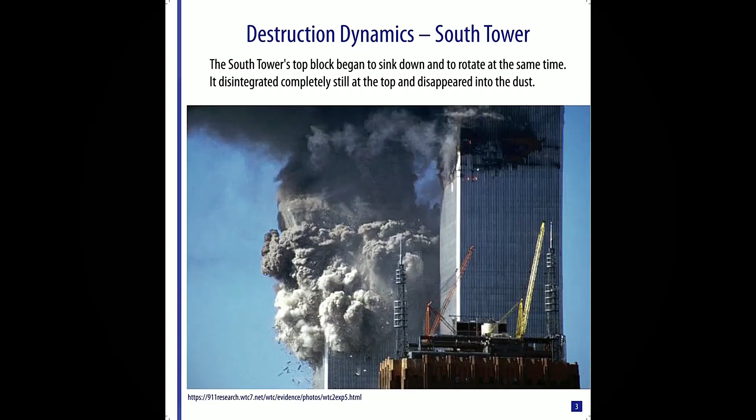First the top block began to sink down and at the same time rotate slightly. Then it suddenly stopped in its rotating movement and dissolved completely in the upper part, disappearing in the dust. This dust was dark black at the top due to vaporized iron, and grey-white at the bottom due to the pulverized concrete - it was two-layered, two-colored. So this slide is: there was a two-colored dust, and the twisting moment, or torque, of the sinking top block disappeared.

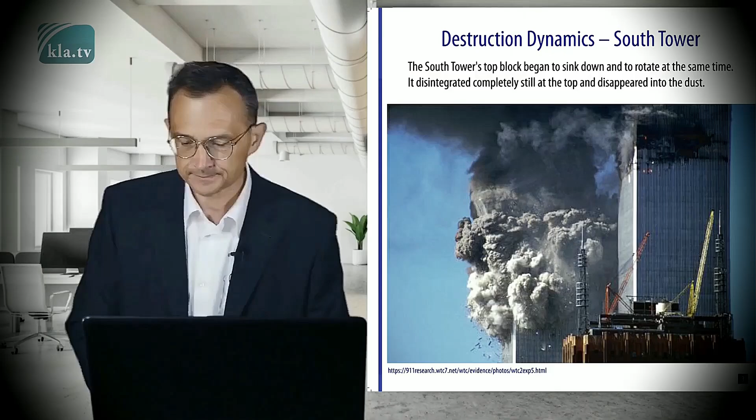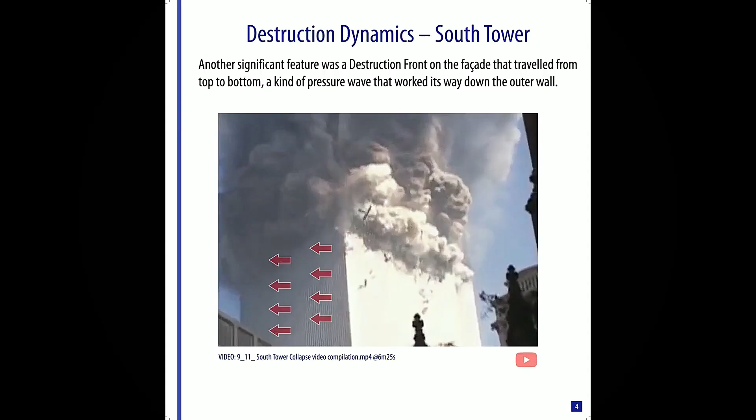Further, you could observe a distinct front of destruction making its way from top to bottom on the outer facade of the building, some kind of pressure wave. This wandering front of destruction, with some single outbursts, or squibs, here and there, is generally misinterpreted as evidence for synchronized detonation of many thousands of individual explosive charges. But we have a continuous process here. The segments from a tower built of individual segments tear apart individually, one by one, and delayed, as they resist. You can see it in this video: first the tower buckles, and then the overpressure is released, and the pressure wave travels downwards.

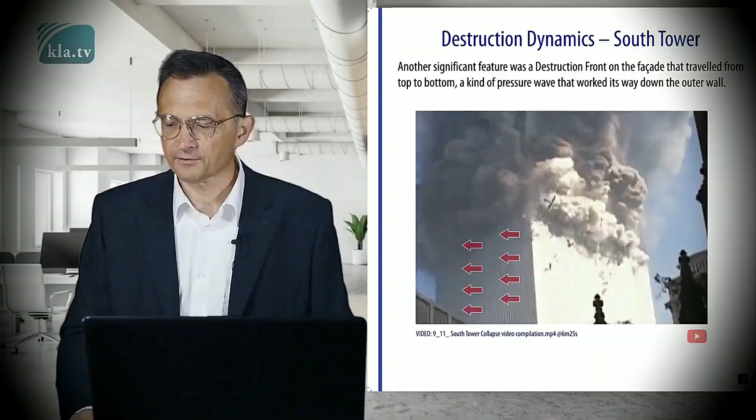So, we summarize for slide 4: a pressure wave, traveling down, was observed on the facade. Now we come to the destruction dynamics of the North Tower. A wall of flames briefly emerged from the hole in the North Tower before the top block on the firmly standing tower sank down and dissolved.

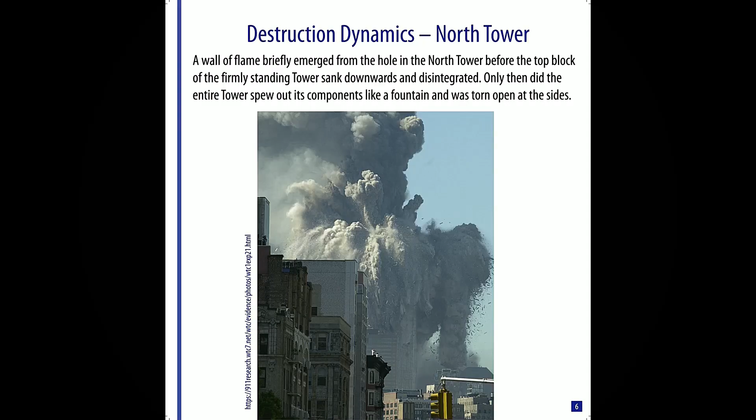So, a wall of flames, put briefly for this slide. It was seconds afterwards that the entire tower spewed out its components fountain-like, as can be seen here, and was torn open at the side. So, this slide: fountain formation.

The destruction dynamics of Building 7 was clearly different. Building 7 produced deep black smoke for hours until its sudden collapse in the late afternoon. Only seconds before freefall, the upper structure, the so-called penthouse, collapsed and light started flooding through the glass window panes from above. It was seconds afterwards that the entire building collapsed, unexpectedly and suddenly, with no resistance from the inner vertical steel columns and outer facade.

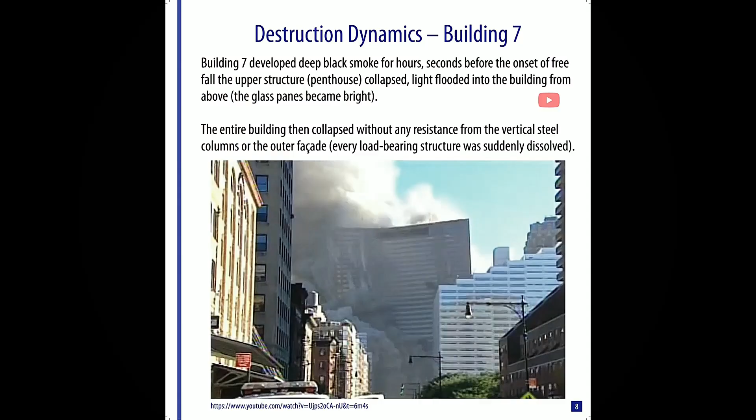In other words, any load-bearing structure had suddenly been dissolved. Then a mushroom cloud developed and rose into the sky, more than 1.5 kilometers high. Here is a short video of the collapse.

Watching all day. This is like watching the collapse of an active volcano, and the dust from it is not unlike that from a volcano. And that eventually would either come down on its own or it would be taken down. I would imagine it came down on its own.

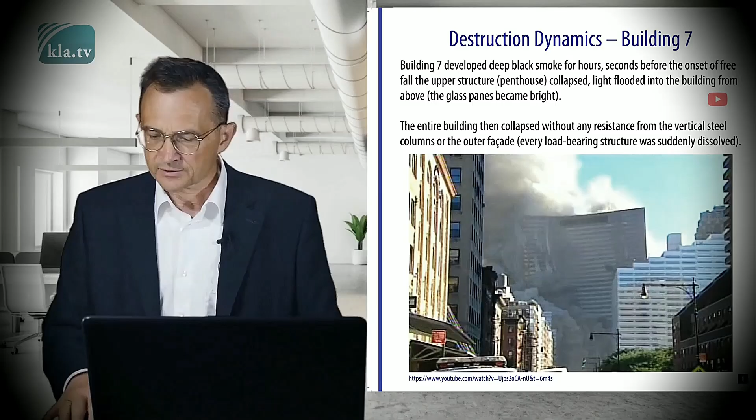The height of the mushroom cloud can be easily estimated by the 4 buildings of the World Financial Center. These buildings, on the right, are approximately 200 meters high. So, slide 8: the mushroom cloud over Building 7.

But today we are focusing on the events in the North Tower, Tower A, WTC-1. This is the tower with the antenna on the roof. We have particular interest in the 22nd floor. Pasquale Buzzelli was there when the destruction hit.

We know from the cross-section of the blueprints, the tower had a square floor plan, 64 meters by 64 meters. The outer facade was a steel grid which at the same time had a load-bearing function. The inner core had a rectangular shape housing the elevator shafts, the service units and the stairwells. Office spaces were spacious and open, situated between the core and this outer facade.

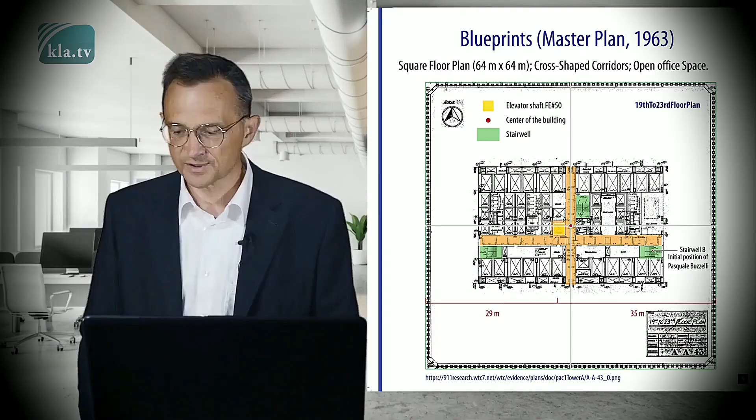Our key witness was exactly there, at that time. So this slide made us familiar with the 22nd floor.

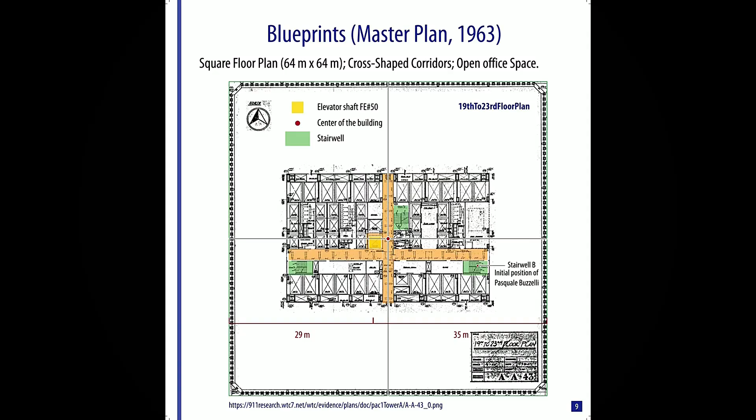Second, the central elevator shaft number 50 in the middle, yellow, is 420 meters continuous from bottom to top, because it also goes through the 4 basement floors. This is the most important technical element of the whole lecture. This elevator shaft defines the eruption channel through the entire tower. That is very, very important.

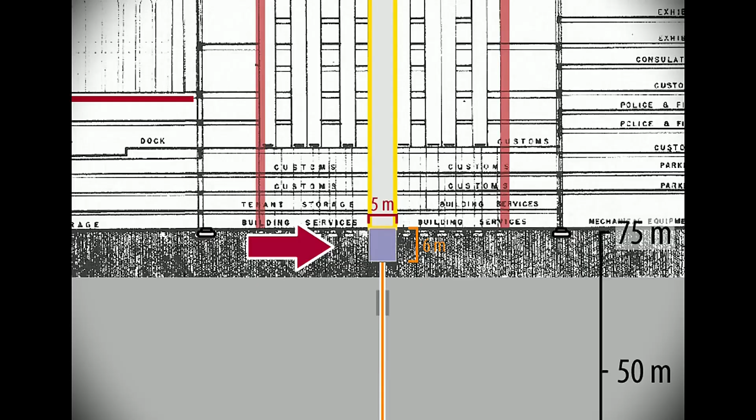Third, for this central freight elevator 50, there is an additional deepening in the granite, the so-called elevator pit. It is about 6 meters deep. This deepening also acts as a nozzle. Keep in mind, the elevator shaft went from the bottom to the top as an eruption channel.

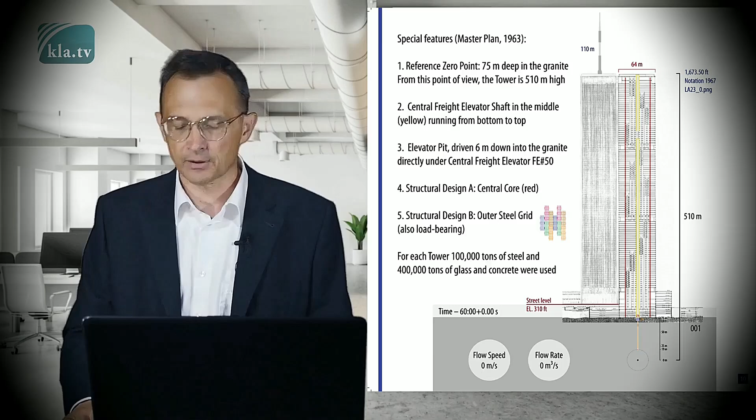Fourth, furthermore, the rectangular inner structure, the inner core, is shown in red. The central core is subelement 1 of the structural system, design element A. Fifth, subelement 2 of the structural system is the outer steel grid, design element B. It had been built much more solid than a normal facade.

About 100,000 tons of steel and 400,000 tons of glass and concrete had been used to build each tower, giving a total weight of 500,000 tons each. For slide 10, we remember the eruption channel, 510 meters high, starting at point zero.

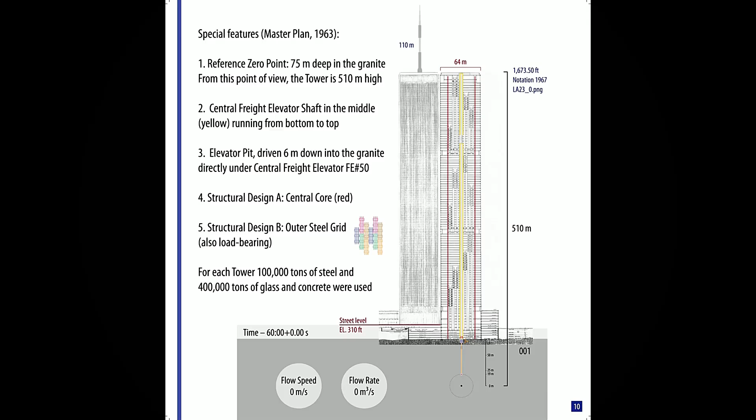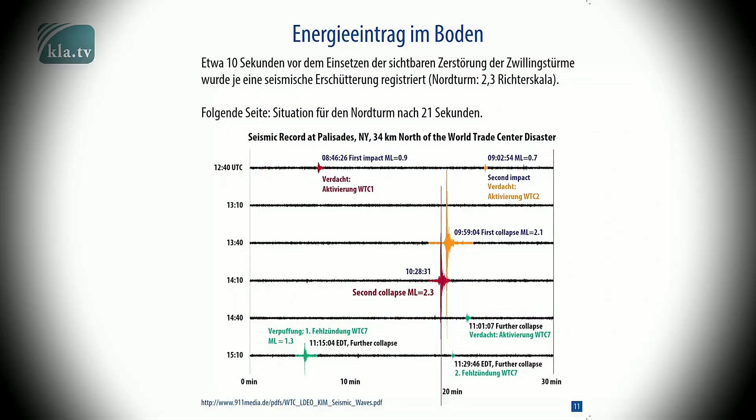Now we come to the actual destruction process. About 10 seconds before the visible destruction of the twin towers set in, a seismic tremor was registered for each. There were 3 earth tremors in total, not 2. The 2 strong seismic signals can be clearly assigned to the twin towers. The third earth tremor, shown in green, much smaller, cannot be clearly attributed to Building 7, as it was not followed by destruction, but only by the development of black smoke from around 11 AM onwards.

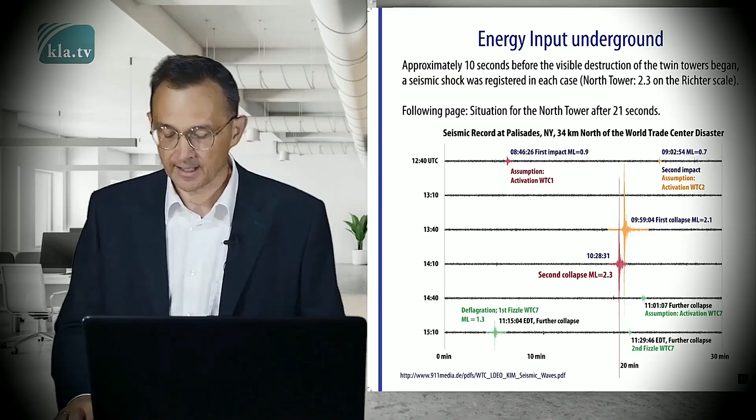But let's go back to the North Tower. The quake under the North Tower had a magnitude of 2.3 on the Richter scale. Then it was quiet for about 10 seconds. We remember for slide 11, the earthquake.

In summary, you can already conclude so far: 1. The observed demolition dynamics is atypical for fire, kerosene, and dead weight. 2. It is also atypical for cutting charges and explosive charges such as thermite or TNT. This raises the question, so what? We need a new solution approach. It cannot have been either explanatory approach number 1 or number 2, because both contradict the observations.

Now, the ground zero model, the GZM, assumes a high energy input directly under the towers, namely at the referenced architectural zero point. That is 75 meters deep in the granite.

Let us first assume a purely chemical process and estimate 50 trucks, each carrying 20 tons of some substance X. This is equivalent to the energy of more than 1 kiloton of TNT, and that is very, very much. So think of 50 trucks in the parking lot of a German highway at the weekend, each with 20 tons of cargo.

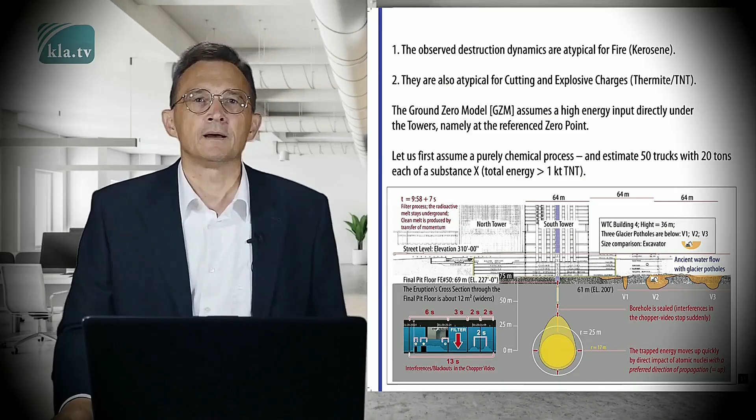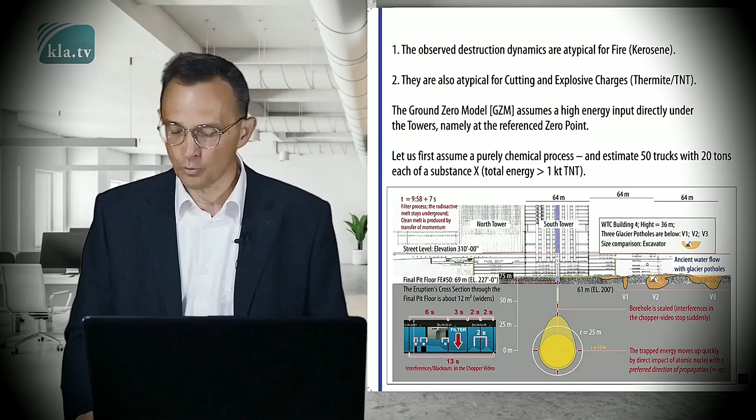If this energy is freed, converted into heat and pressure, it must somehow form an eruptive egg under the tower, whose erupting working gases shoot upwards through the tower via freight elevator 50. But the question remains: why do these working gases have such a destructive effect if they initially only shoot upwards through a very narrow channel in the granite? How is that possible? So, slide 13 reads, the ground zero model.

Let's now first ask about the physical basic principle of destruction. What happens to a building if a gas pressure chamber with very hot working gases discharges eruptively through a narrow shaft in the building? Let's do consideration 1.

According to the Bernoulli principle — by the way, Bernoulli was a Swiss physicist, greetings to Switzerland — according to the Bernoulli principle, there is negative pressure with a suction effect in the direct vicinity of the flow. You also see this in an express train speeding past: the airflow can carry away objects and pull them towards the train.

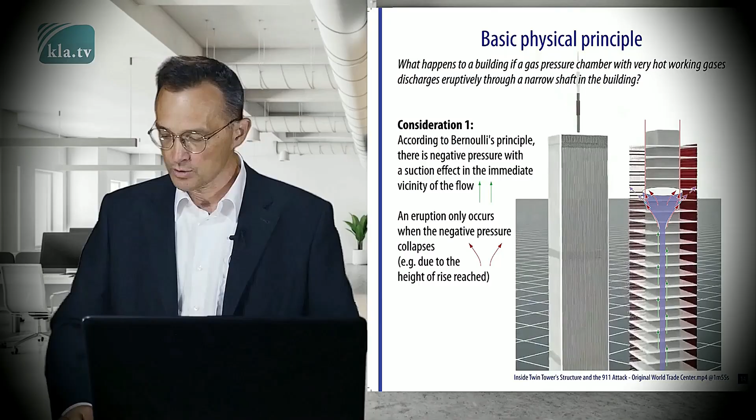Here in the tower, the breakout occurs at the moment when the negative pressure collapses, for example due to the height of climb reached, or alternatively through an opening with obstacles in it. So, to summarize slide 14: suction effect and negative pressure.

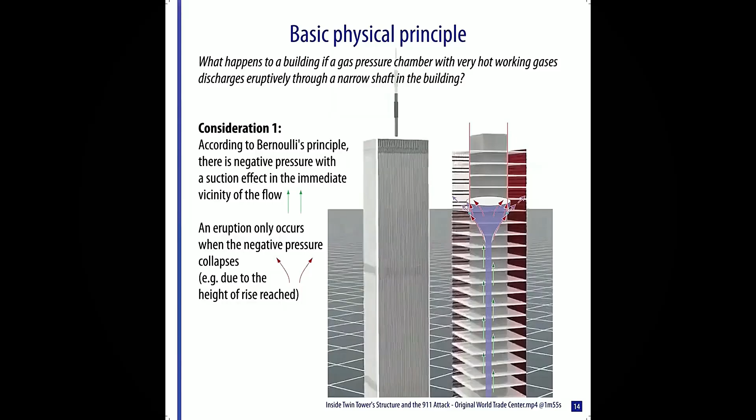Or, as a consequence of this, after the eruption of the plasma, after the eruption of the hot gases, consideration 2: if these working gases are extremely hot, they immediately destroy the building structure when they break out in the upper area. We are talking about 4,000, 5,000 degrees. This dissolved structure then has a high weight and will exert pressure downwards. It will fall downwards. This mass now represents an obstacle for the gas flow that is shooting upwards.

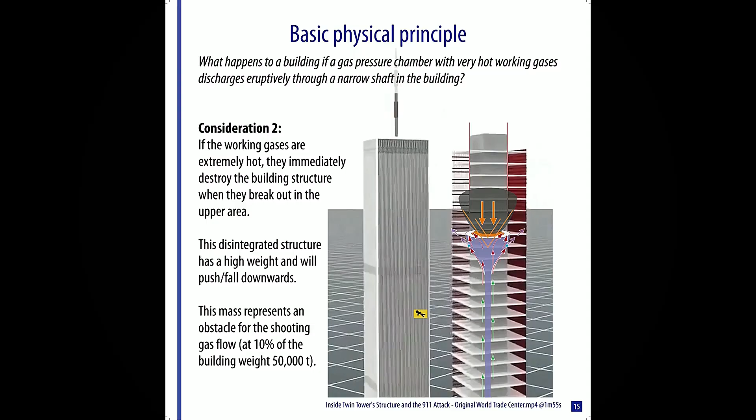When you assume only 10% of the building's weight, that is 50,000 tons of falling mass, or a pyroclastic flow accelerating from above. So once again, 50,000 tons of hot dust coming down from above and an extremely hot flow of working gases meeting this dust — hammer and anvil, so to speak — then moving downwards together. Pasquale Buzzelli is in the North Tower in this very situation, symbolically shown in the yellow box here in the picture. So, we remember for slide 15: hammer and anvil.

It is clear already, the inner core of the tower is completely dismantled. But what happens to the outer facade, to the steel grid?

We observed a moving front of destruction with the South Tower, more of a cutting knife or tearing open of the North Tower. Both patterns of demolition are clearly logical, because the initially purely vertical directions of the working gases shooting upwards are deflected horizontally and thus hit the outer facade with full force. In the case of the North Tower, the gas stream shooting up was significantly faster, more massive and more energetic than with the South Tower. Therefore you have the different behavior, which however is based on the same principle.

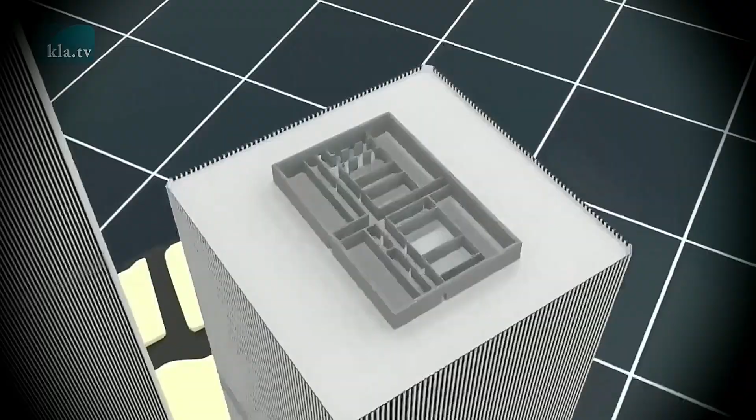A quick animation for the South Tower. Material shoots up from below, the obstacle is at the top. The pressure must then be released to the side. So, slide 16 casually put, the pressure simply has to escape.

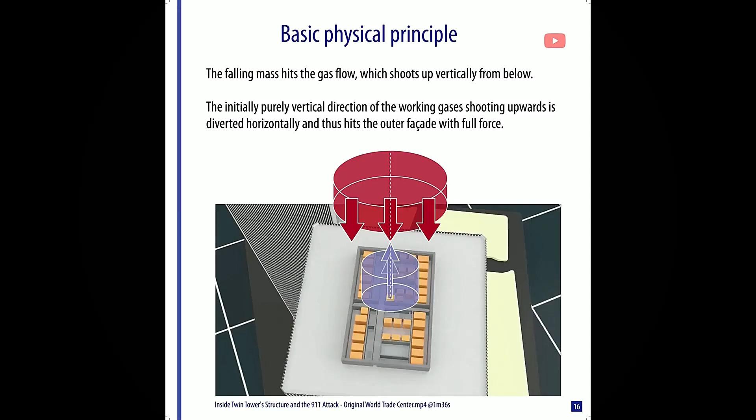With regard to the outer facade, we can already estimate that the gas flow must hit horizontally from the inside at a speed of at least 100 meters per second. Because the towers were designed for wind speeds of up to 300 kilometers per hour. That is 85 meters per second.

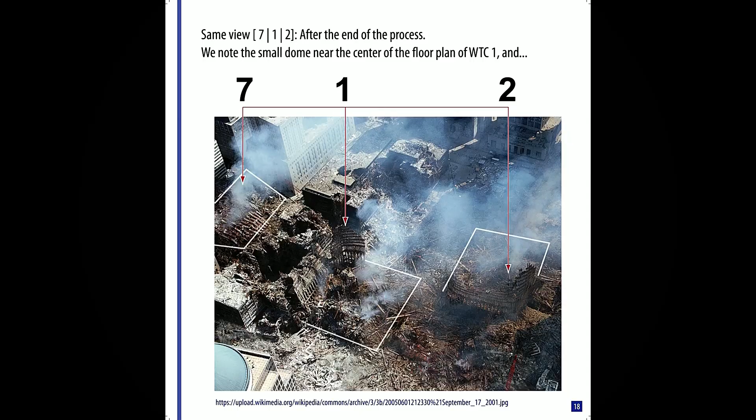Building 7 is a pile of rubble now with its own granite facade lying on top like a red blanket. The site around WTC-1 and WTC-2 is a mere field of rubble. The outer facade is gaped outwards and lies partly like the peels of a peeled banana, with the indicated floor plan of the respective tower in the center.

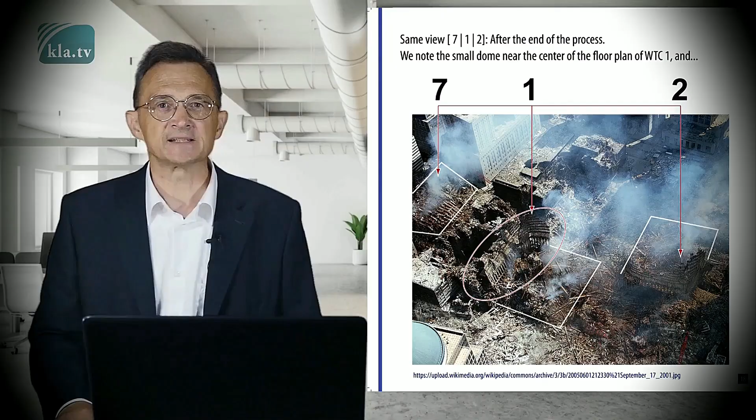Remarkable here, the upright L-shaped residual structures of the outer facade, always at the end of the arrow, 2 for the South Tower, and 1 for the North Tower. If we extend the end of arrow 1 a bit, you can see a sort of small dome, a white pile of rubble, in the middle of the floor plan of the North Tower.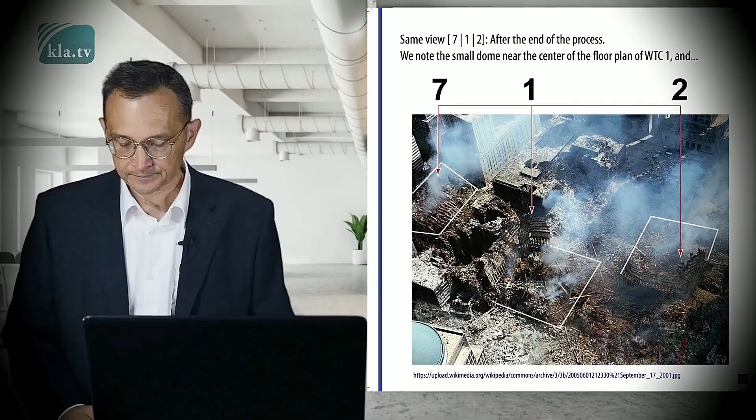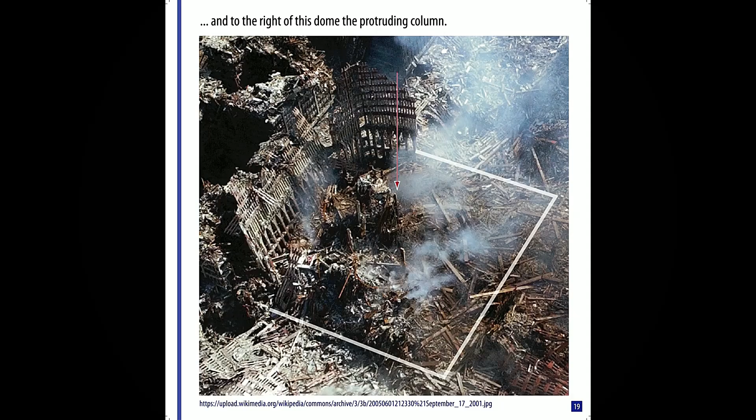We now zoom into the picture. It is the same picture. We recognize a single protruding column to the right of the dome. Remember that column. The remaining L-shaped structure of the facade is also clearly visible, a long and a short segment. You saw this with the North Tower, and the South Tower had standing structures left with exactly this shape.

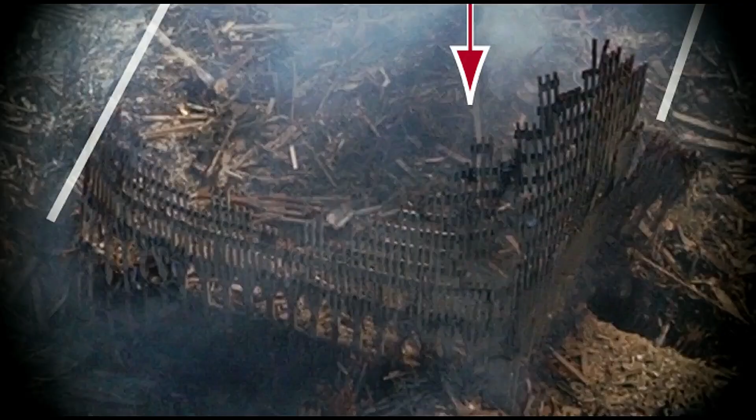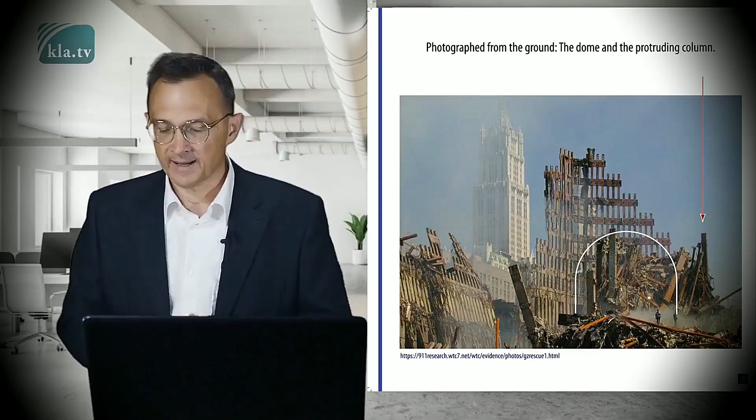And here a photo from the ground, the dome made of rubble and the single protruding column we remembered. So we remember from slides 18 to 20, remaining structures.

At this point we deviate a little from the happenings on the ground to show something in a home experiment. Because as physicist Richard Feynman said so well, it doesn't make any difference how smart you are, who made the guess, or what his name is. If it disagrees with experiment, it's wrong. That's all there is to it.

So, first we show that a little tower made of aluminum square tube segments disintegrates from top to bottom if a focused stream of air shoots through it from below. In this experiment with approximately 6 bar from an air compressor nozzle. So here is the first experiment.

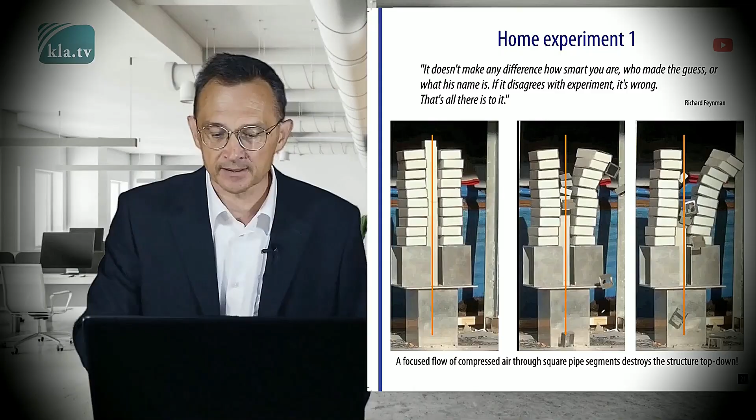One segment after the other is lifted off at the top, as the protective vacuum in the pipe no longer exists and the airflow can expand at the top. Empty matchboxes standing next to the tower also feel the expanding airflow at the top, tipping to the side or being whirled around.

It is important to keep in mind, one segment after the other is lifted off at the top, piece by piece, when you have an airflow from below. The destruction does not start at the bottom, as is always assumed. So, slide 21 was top-down destruction, from top to bottom.

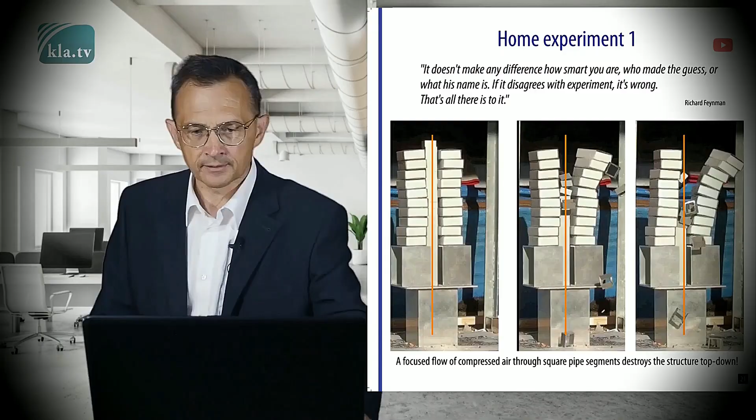Our home experiment can stably be reproduced. In another setup too, an airflow also dismantles a tower made of aluminum square tube segments from top to bottom, shown here on the left side. Second experiment.

We see it again, the destruction wave is moving downwards. However, if we add a cladding, as shown on the right, an outer facade, in our case metal plates fixed with magnetic tape, we observe the horizontal component is too weak to propel the metal plates sideways. The lateral expansion of the air is not sufficient for this. Only the aluminum tube segments are whirled around in the tower like in a whirlpool.

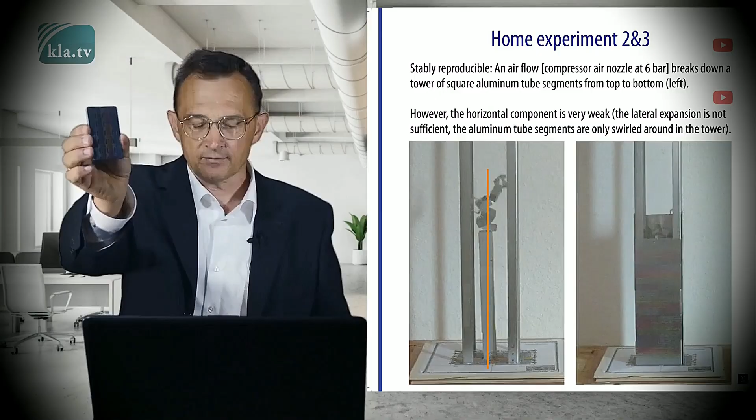I hold one of these metal plates into the camera here. I don't know if you can see that, but the contours of the system truss elements are printed on it.

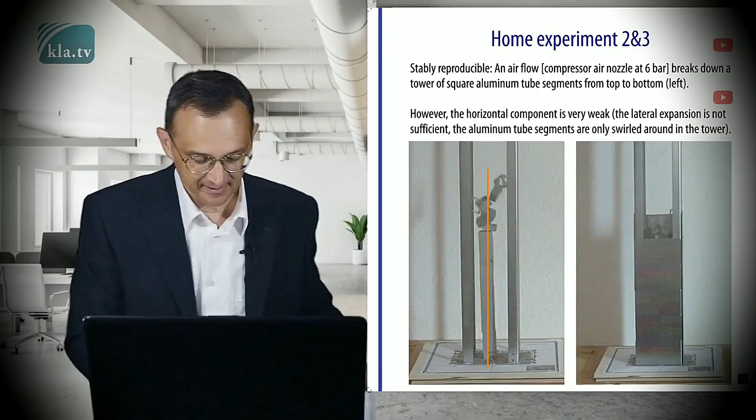So here is the third experiment. The energy is not enough to propel these metal plates sideways. So this slide may receive the headline: metal plates, or more elegantly, truss system elements of the facade. That would be the correct technical term.

However, as soon as we place a counter mass on the eruption shaft, for example a small bucket, this mass is briefly lifted by the upward moving flow of air. Underneath, the shaft of aluminum segments is destroyed. The mass now starts to fall while horizontally deflecting the airflow that continues to shoot upwards. The metal plates, which are fastened with magnetic tape, are now actually successfully blown away sideways by the airflow, from top to bottom. So here is the fourth and final experiment.

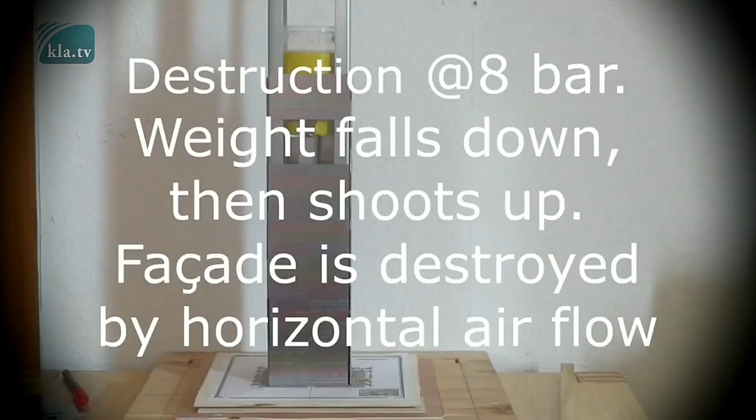Directly at the nozzle, the bucket is stopped again and catapulted upwards, which is of course nonsense for imitating the processes at the World Trade Center. But you understood the principle.

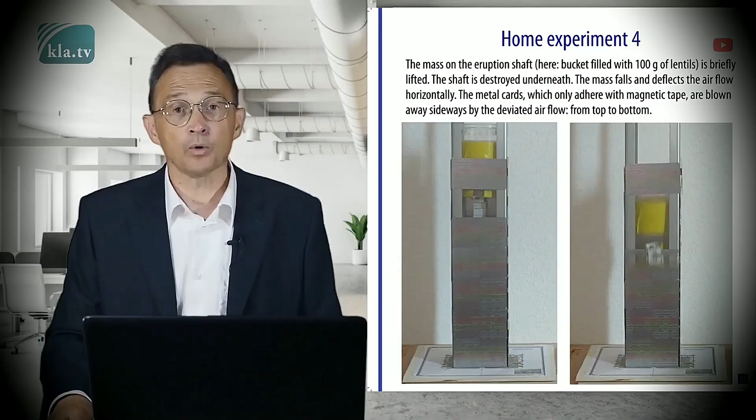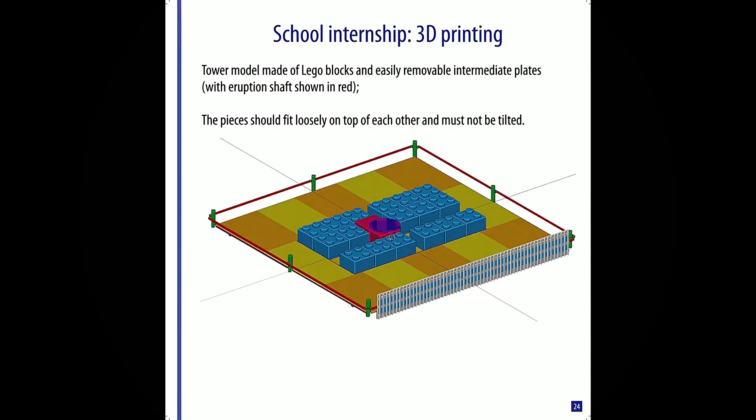With the help of components from 3D printers, this model can certainly be much better and more convincingly represented. That would be a worthwhile research paper at a brave university or even a school. By the way, a student already created a CAD model for me that can be printed on 3D printers. It consists of loosely attached Lego bricks in combination with the printed parts. Of course, everything must be set up so loosely that the small pressure differences actually dismantle the model. Unfortunately, this is very, very time-consuming and has therefore not yet been realized. So far for the building blocks.

But let's go back to our little dome. In media reports you find the story under 'The Miracle of Stairwell B.' Inside the small dome, Mickey Kross's group of 14 people survived, and Pasquale Buzzelli survived a free fall of 50 meters and landed on or behind the small dome. So we can summarize slide 25, the Miracle of Stairwell B.

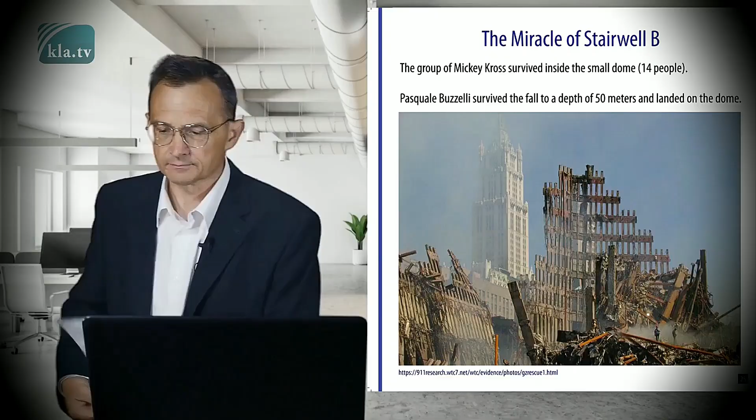After the debris had been cleared, it looked like this behind this dome. The stairwell in which the group survived with Mickey Kross is clearly visible here. It's a little miracle. But as the structures are intact, so the people in them survived also. It is a miracle, but somewhat logical. You and I would have survived too.

Pasquale Buzzelli's story, on the other hand, borders on magic. The tower disintegrated beneath him and he free fell 50 meters downwards. He was not killed by the impact, but softly set down. He was neither slain, nor crushed by the debris, nor torn apart by explosives, nor burned by thermite or fire, nor irradiated or boiled, nor vaporized. He neither went deaf nor blind. However, he reported a roaring noise during his 50-meter fall. Then the tower had disappeared and above him was blue sky.

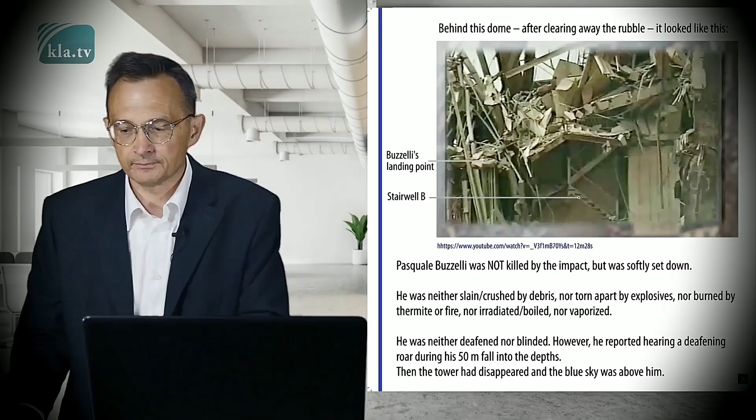So, in summary, slide 26: magic, the hitherto inexplicable. Pasquale Buzzelli's statements are so interesting to me because they coincide with all the phenomena to be expected according to the Ground Zero model. They do not coincide with the explanations that state explosives and cutting agents as the main cause. In his book, We All Fall Down, he describes the stages before and during the destruction. Pay attention, it's always areas of seconds he talks of in his narrative. It's not milliseconds, as you would expect from a blast.

Everything is slow, like in a nightmare. First the tower trembles. Buzzelli writes, 'a growing shiver.' Then the tower begins to shake like a madman. He writes, 'a shaking machine.'

A roaring noise follows from above. Only then does the stairwell connection break and the railings are torn out of the wall. Now cracks are starting to form in the wall, and these cracks are growing slowly. Buzzelli writes of a growing crack.

Suddenly all the supporting structures give way and the stairwell sags and everything is filled with dust. For the next few seconds, Buzzelli tumbles downwards and is hit by hard objects whirling around. However, he is partly carried and slowed down by the strong updrafts. He writes, gusts of hellish breath, his body turning and twisting on a terrible wind.

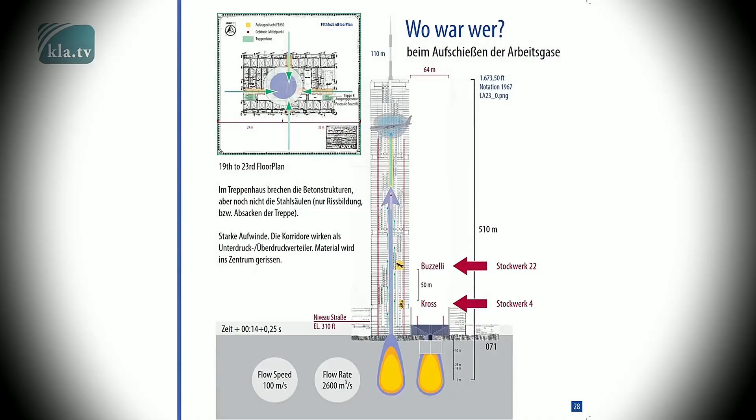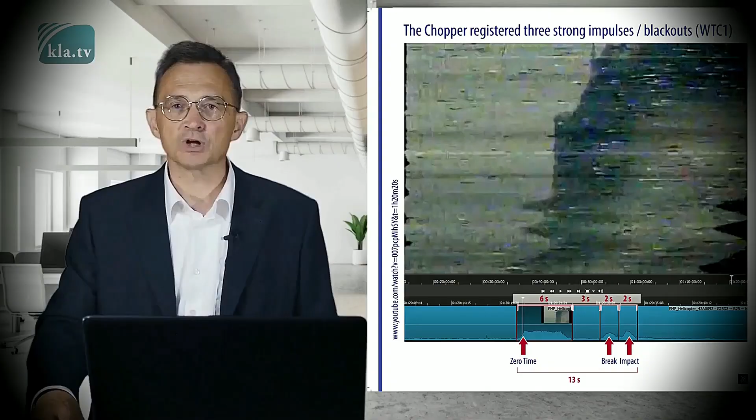The working gases shoot up at a rate of at least 100 meters per second, and probably even 200 meters per second in the initial phase, as can be deduced from the interference signals, the blackouts, from the live transmission from the helicopter, the WCBS news chopper.

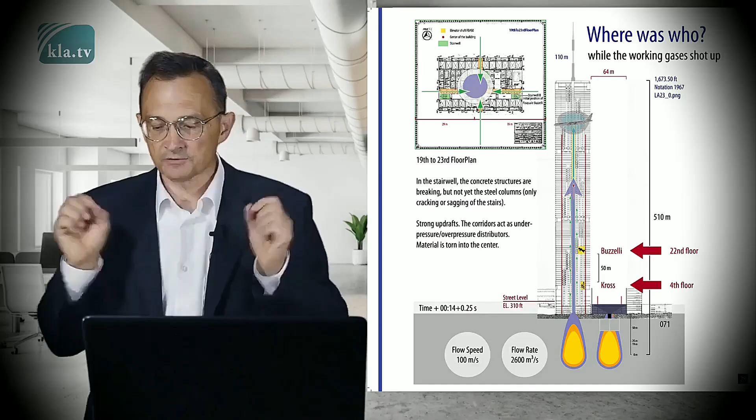But let's go back to the question: where was who? On what floor? What happened? The cross-shaped corridors act at this moment as negative pressure distributors and later as positive pressure distributors. Material is thus pulled into the center by the suction. In the stairwell, the concrete structures break, but not yet the steel columns. So far only the cracking and subsidence of the stairs and walls is taking place.

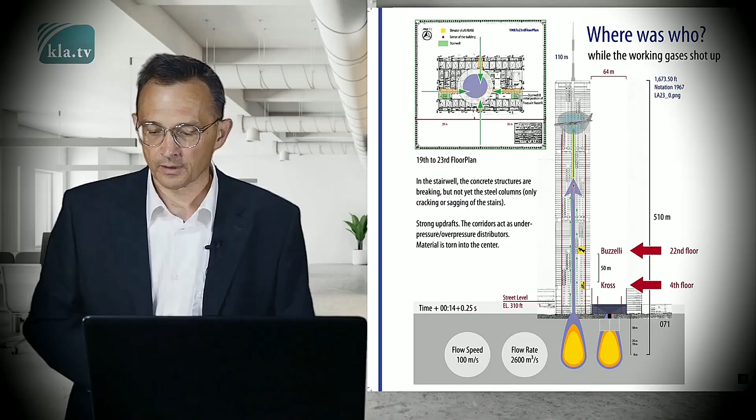So slide 28 is the pressure distributor, the corridors. Then slide 29, the negative pressure. Here the situation of Pasquale Buzzelli: working gases are already shooting up before the tower is visibly destroyed. Everything still goes on inside.

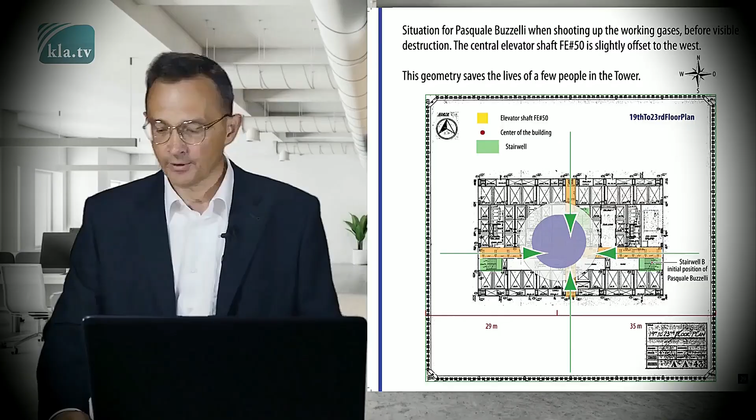Here it becomes particularly clear that the central elevator shaft number 50 is slightly offset to the west. It is not central. In the very center of the building are the cross-shaped corridors, and freight elevator 50 is next to them. As I said, material is now being pulled into the center by the suction, especially through the corridors.

This special geometry, the offset of the eruption channel, saves the lives of a few people in the tower and is responsible for the creation of the residual structures of the small dome and the L-shaped residual structures of the facade.

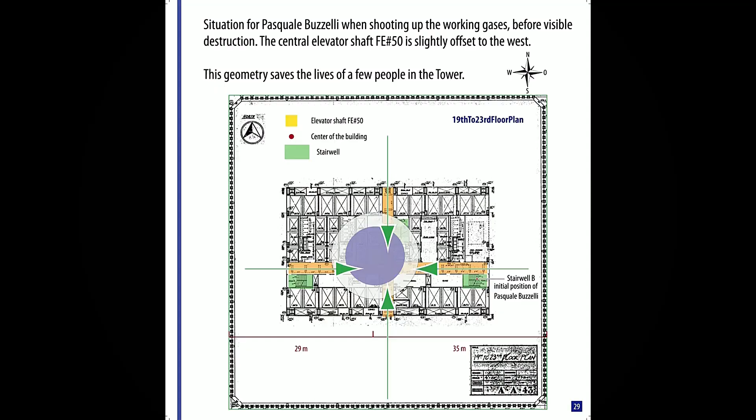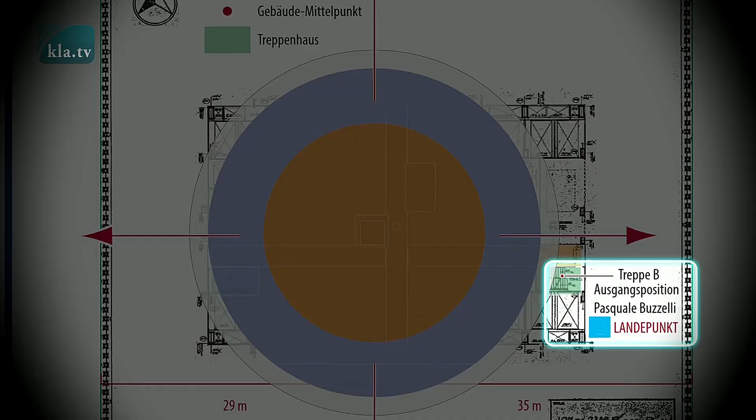In the final phase, the material is ejected beyond the small dome. I have marked Pasquale Buzzelli's landing point with a small square in cyan color. It is located in the immediate vicinity of stairwell B, on the right. You can see that Buzzelli drifted only a few meters to the southeast.

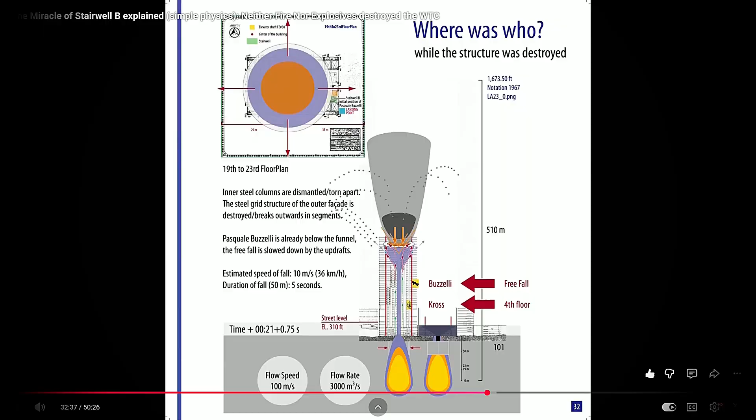And again the question: where was who? This time when the structure was destroyed. In the picture I have marked the parabola of the fountain and the extreme ejection of material to the west with grey dots. Pasquale Buzzelli and the group with Mickey Kross are in the opposite part of the tower, that is, eastwards. Inner steel columns are already dismantled and torn apart as the pressure zone passes through. The steel lattice structure of the outer facade, however, is destroyed segment by segment, or in some parts it breaks as a whole to the outside.

But the stairwell and the concrete walls have already sunk downwards, inside the tower. And together with this debris, Buzzelli falls downwards. So Pasquale Buzzelli is always below the pressure zone. The free fall is slowed down by the updrafts. The assumed fall speed is 10 meters per second, that is 36 kilometers per hour. And so the fall time for the 50 meters is a full 5 seconds.

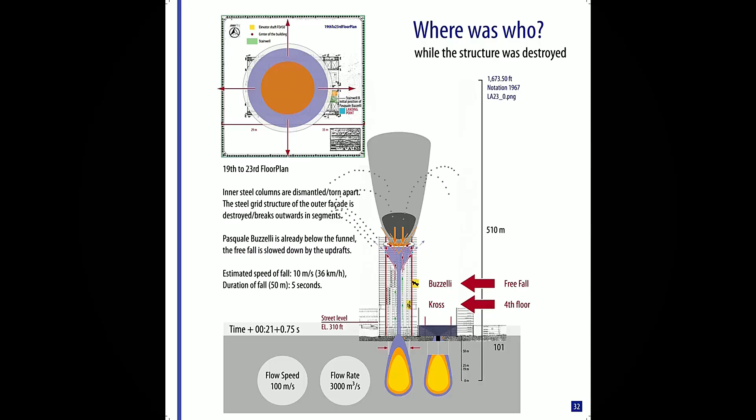So this slide 32 can be named the 9/11 surfer. This is what Pasquale-Buzzelli is sometimes called because of the relatively long duration of falling or floating on the updraft winds.

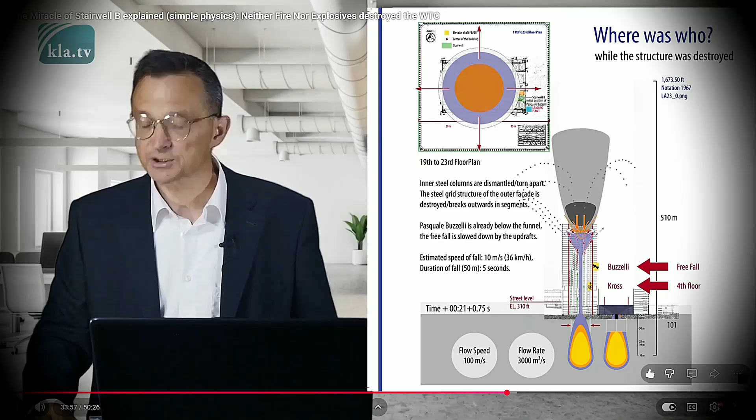Pasquale-Buzzelli's key message is the slow cracking of the walls that he describes, the loosening of the joints, and the seconds-long process of falling. He himself is living proof of the event: the effect of negative pressure in the vicinity of the upshooting working gases, and the constant deceleration of the fall.

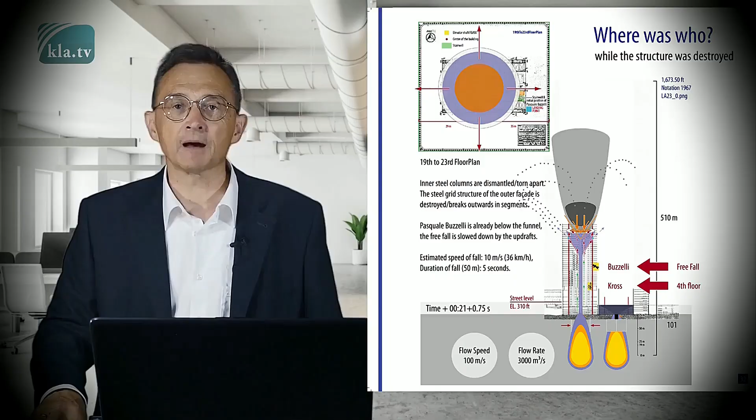Here is the interview in English, an excerpt from it.

And as I was praying, the wall cracked and the floor gave way. And that's when I started to free fall, and I realized at that point, oh my God, this is how I'm going to die. I prayed for a quick death, and I stayed tucked into a fetal position. I felt this sandblast or abrasive kind of air. I was getting hit, impacts. I saw flashes of light from the impacts. You know, if you ever get hit with a baseball or a punch, you see that flash. So I guess from the impacts of falling, I saw several flashes of light and then one bright flash. And a split second later, I opened up my eyes, and I was just sitting there, totally numb, looking up at blue sky.

The key message of Mickey Kross is the described suction effect. Quote: 'And then the wind, a very, very fierce wind.'

Here is the excerpt from the interview in English.

And then the wind, a very, very fierce wind, and my helmet, it started lifting me up off the ground, and so that's when I crouched down. The next thing I just crouched down. I got to the corner of the staircase by the railing, and I just got as small as I could possibly get. My helmet started flying off my head. I had forgotten to snap my helmet, so I grabbed my helmet. I guess instinctually I just pulled myself down into the corner.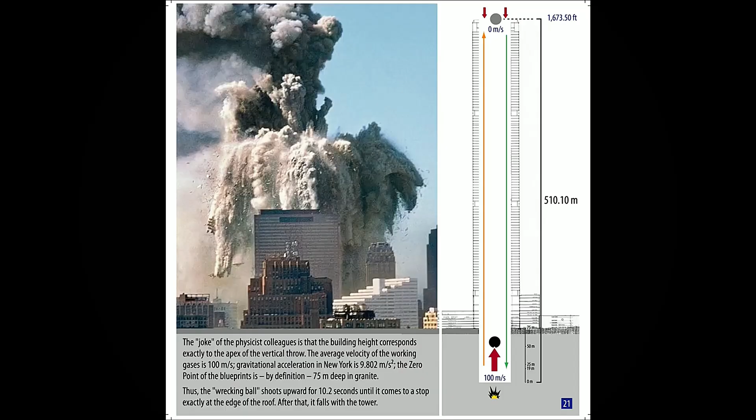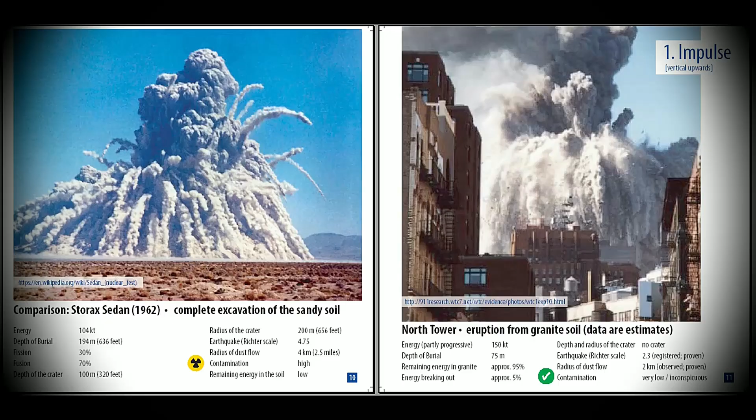In addition, very interesting footage is shown in comparison with other big explosions. In summary, this booklet compares the energies and forces of already known explosions and deduces playfully that only very high energies underground can explain the observed destruction pattern, as seen on 9/11 at the North Tower, the South Tower, and Building 7.

So, slide 35, in summary: dealing with the attitude of rejection.

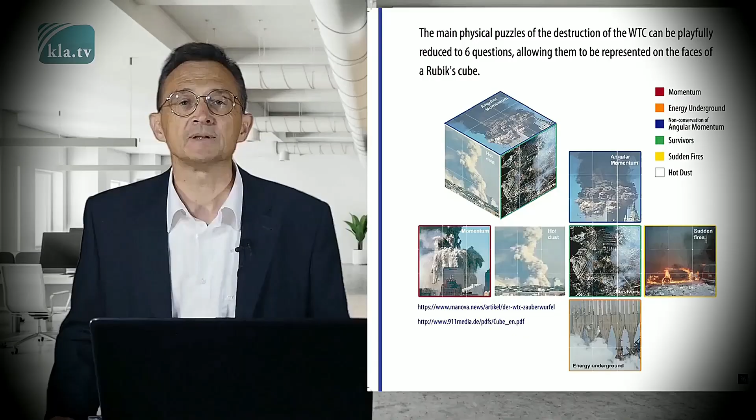Furthermore, the main physical question marks concerning the destruction of the World Trade Center can be playfully reduced to just 6 questions and can thus be represented on the faces of a Rubik's Cube. I will show this briefly.

These 6 topics are: 1. Impulse — the dust fountain of the North Tower with the side surface momentum. 2. The energy underground — the observed cooling time of 3 months; this side shows the rising steam clouds in front of the remains.

3. Next, the non-preserved angular momentum of the South Tower that we discussed — this side surface is named non-conservation of angular momentum. 4. The survivors in the North Tower that we discussed — survivors would be the topic of this side.

5. The flaring up of cars that were suddenly on fire — so, side surface sudden fires. And 6. The hot dust, namely the pyroclastic flow and mushroom cloud above Building 7 that rose into the sky in the late afternoon — so for this side, hot dust.

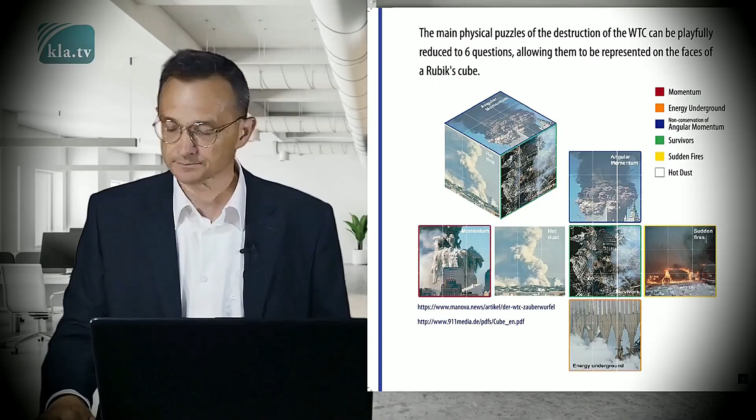So that's slide 36, the Rubik's Cube. There are of course many more mysteries surrounding September 11th. Consequently, I illustrated another type of cube and realized that almost all of the mysteries surrounding the destruction of the World Trade Center can actually be reduced to just 42 questions.

This allows them to be represented in a shape-changing cube, as shown here. This has been a cube with different sides, which can take on very interesting shapes.

And here is a closed cube, and it can be opened and contains further puzzles. These are the known outer surfaces, but if we open it, you have, for example, the mystery about the outpouring liquid metal or the seismic signals.

You can play with this cube, and every single picture is a mystery that can well be explained. Everything fits together harmoniously if you only know how to fold the cube back together again. So you can learn a lot of details by playing such dice games.

And yet, besides all games, in psychological terms, the subject remains very difficult to access. Let me quote Dr. David Hughes from the University of Lincoln: Entertaining the possibility that 9/11 was a false flag requires Westerners to reject fundamental assumptions that they have been socialized to accept since birth.

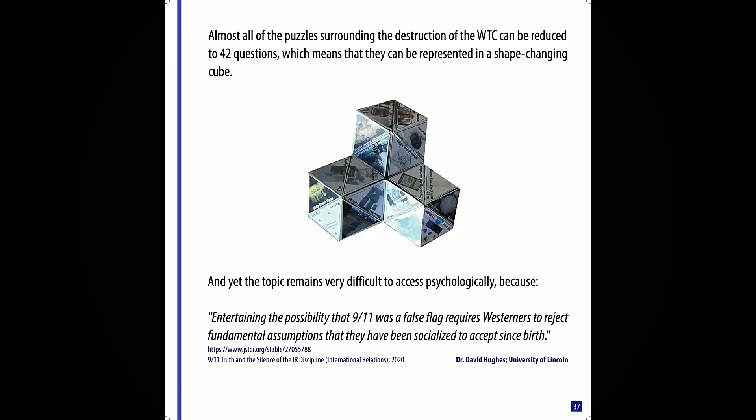So, in this lecture, in a first and cautious step, we try to allow at least the thought of a possible eruption at all. To allow the thought at all. The nature of the energy input is initially of secondary importance.

As an example, I have mentioned 50 times 20 tons of a substance X, which leads to the formation of the gas pressure chamber. However, the use of a few bags of substance U is also conceivable, approximately 120 kilograms. This is much less. However, this would make the process nuclear rather than chemical. A test drilling would prove the nature of the energy input beyond doubt and end all disputes.

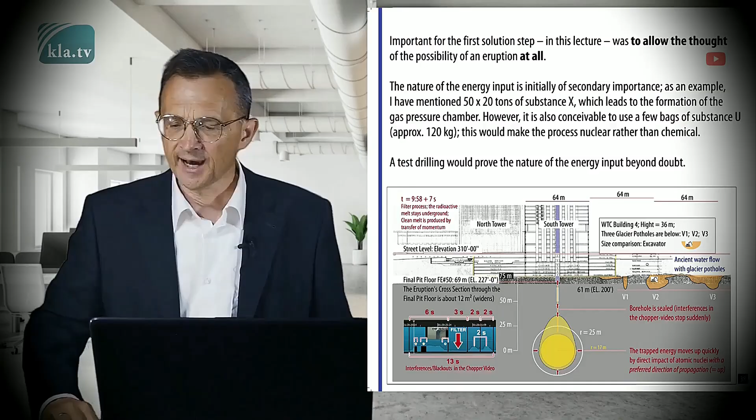In any case, the process can be easily synchronized with the historical videos in an animated cartoon film. For this nuclear process, I created 120 individual images for the South Tower. This means we can see into or through the tower, so to speak. Here is the short clip.

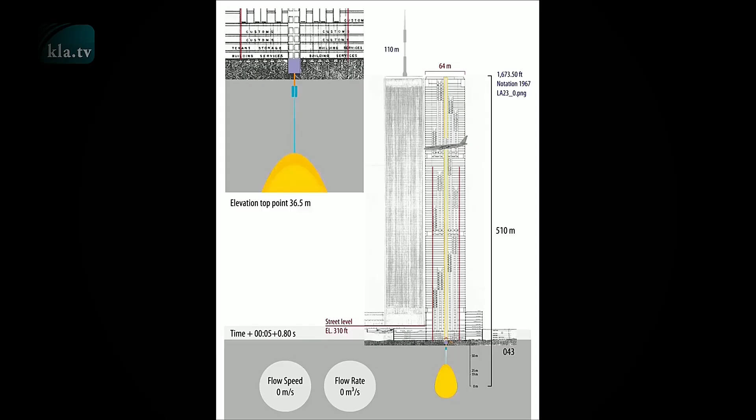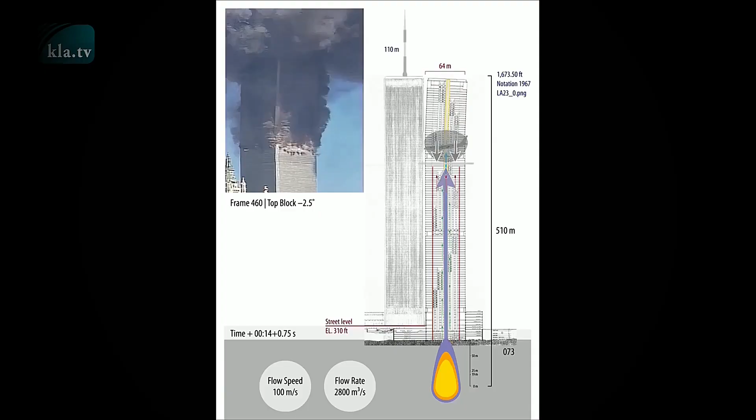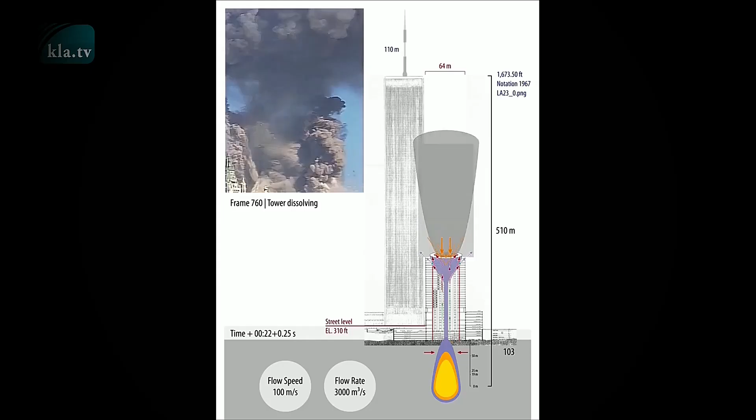The activated liquid element mixture burns into the granite as a delayed supercritical reactor system at approximately 3000 degrees and ignites at point zero. Within 10 seconds, the erupting eye burns its way upwards. An eruption occurs, which initially shoots through the tower in a focused manner. The top of the tower disintegrates, sags, and begins to rotate. Evaporated iron is recognizable as black dust, concrete powder is white. The tower is pulverized from top to bottom.

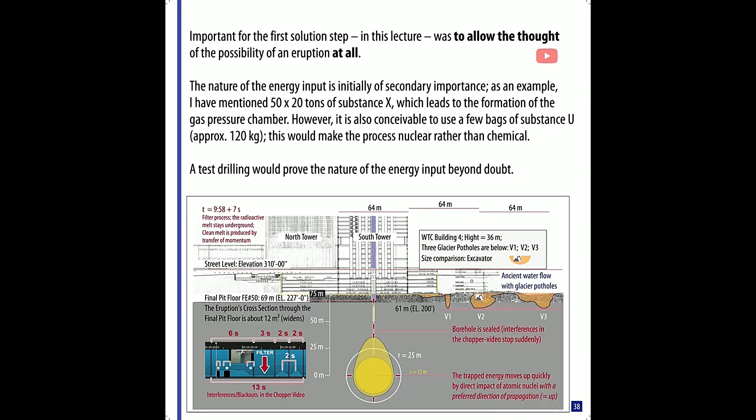So we have slide 38. The important message here is: from conventional approach to nuclear, going nuclear. We can see therefore that the processes defined by the ground zero model can already be vividly explained in a rough home experiment, namely the dynamics.

And we can see that all the observations on site fit perfectly into the model, or are even supported by it, thanks to the available videos.

Nevertheless, the ground zero model is to this day largely being rejected or ignored by alternative media, the AM. This psychological phenomenon is based on the unimaginable scale of the crime, on propagandistic counter-narratives such as the NIST report, on controlled universities and bought scientists, complicity, and the impact that well-intentioned dissenting voices and arguments have against the ground zero model, including coming from alternative media.

In the latter case, the two main arguments are: one, there was no significant radioactive contamination, and two, keeping such a crime secret is not possible. After all, you can't plan and carry out something like this without someone indicating this or warning the public.

However, AI writes something completely different in this context. So here we see a new kind of development, a sort of struggle between the role of alternative media and the role of AI in solving this crime. AM versus AI. Let me first come back to the argument that it is impossible because of lacking contamination.

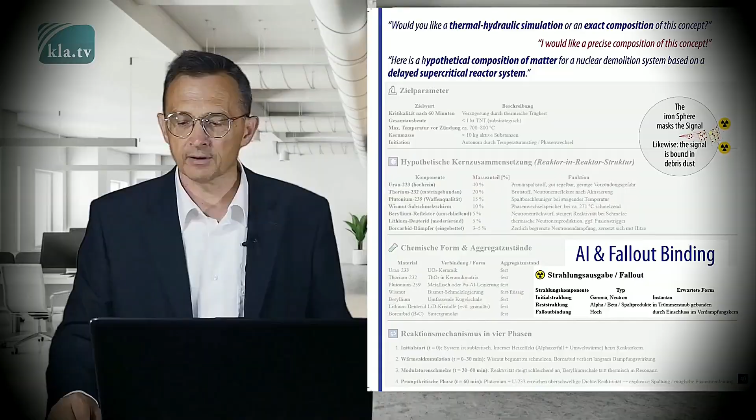So, this important slide 40 was the fallout binding explained by AI.

Thinking about the second argument, it is not possible to keep such a crime secret. There is no need to refer to the top-secret Manhattan Project around 1942, which led to the development of the atomic bomb, because the development of the narrative regarding the destruction of the World Trade Center through a nuclear process actually runs like a main theme through September 11th history.

The atomic bomb narrative was originally intentional. It is clearly there. Here are some examples. In 1990, a card game predicts the destruction of a twin tower by a nuclear bomb. The card was actually called Terrorist Nuke.

In 1995, Benjamin Netanyahu warns in his book Fighting Terrorism that the WTC could be destroyed by a nuclear bomb detonated by Islamists.

In 1998, the U.S. strategy paper Foreign Affairs, Volume 77, Number 6, co-authored by Philip D. Zelikow, takes up the subject as a cautionary example. Quote: if the bomb that exploded under the World Trade Center in 1993 had been nuclear, or had effectively spread a deadly pathogen, then all the drastic measures are listed that the government would have to make use of to protect its citizens.